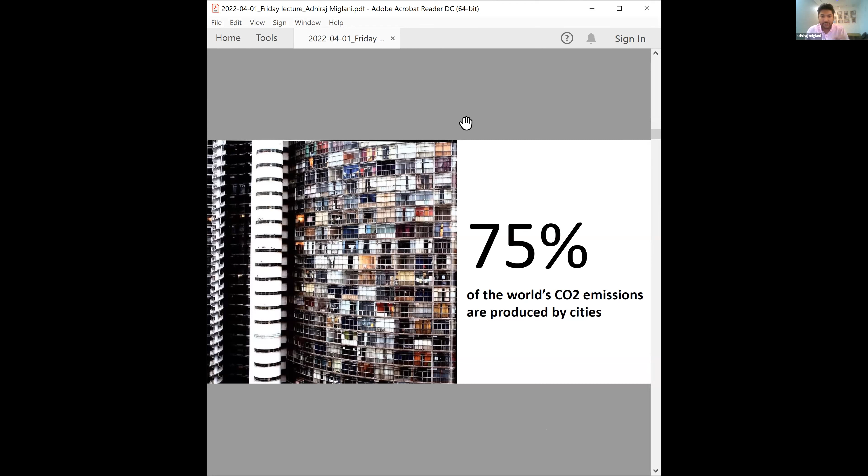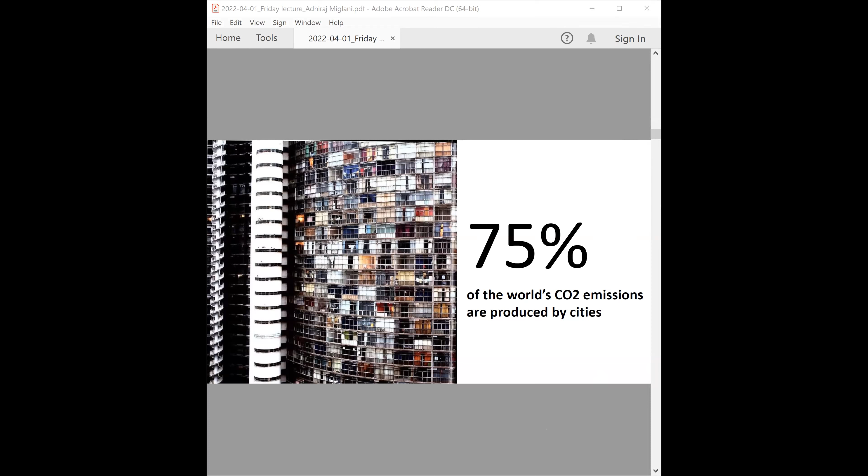Adhiraj, I'm sorry to interrupt, but could you just put the presentation in full screen mode? Oh, okay. Yeah, thank you. Sorry, Tushar, there's something happening. I'm not able to see that. It's still visible in the window. Because what happens is my screen goes black when you put it on full screen. Could you just reshare your screen and then try that? Yeah, that will solve the problem. Just a second. Sorry for this. Is it fine now? Yes. Okay. So as you can see, sorry.

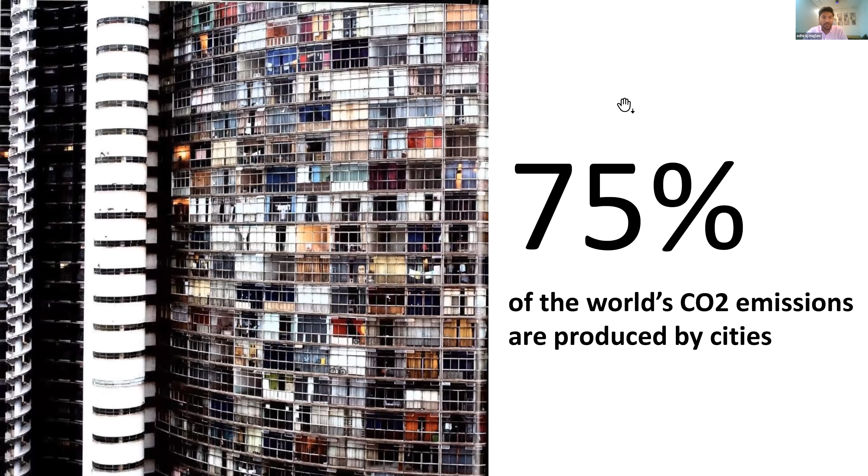There's a growth in urban poor in the cities. Maybe it's time to craft sustainable housing solutions for them. Then, as we can see, in some of the cities there are 40 people per minute being added. So it's a huge, huge number, I would say. And in India especially, 70% of the cities still need to be developed. So we really need investments to focus on this opportunity so that we can realize it to the fullest.

Then I pose this question to everyone: is the city a ticking time bomb, or is the city an opportunity? Can we sustain the city as a great environment to live, work, and play, and yet it can be an economic engine? How do we ensure that our cities grow sustainably and our buildings reduce their carbon footprint incrementally? Is building green the solution, or are there credible alternatives?

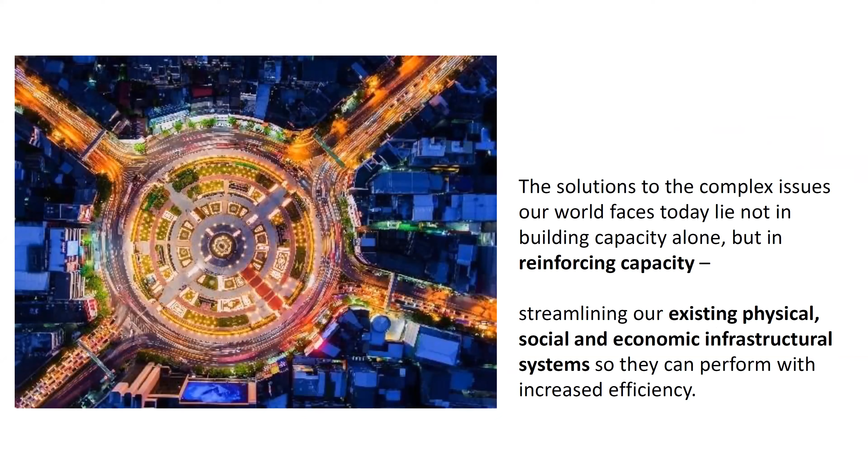There's a growing understanding amongst architects and urban planners of the latent potential of disused and underutilized buildings and urban spaces in our cities. It points to the general progression of the ideas from the circular economy. The circular economy is based on three principles: eliminate waste and pollution, circulate products and materials, and regenerate nature.

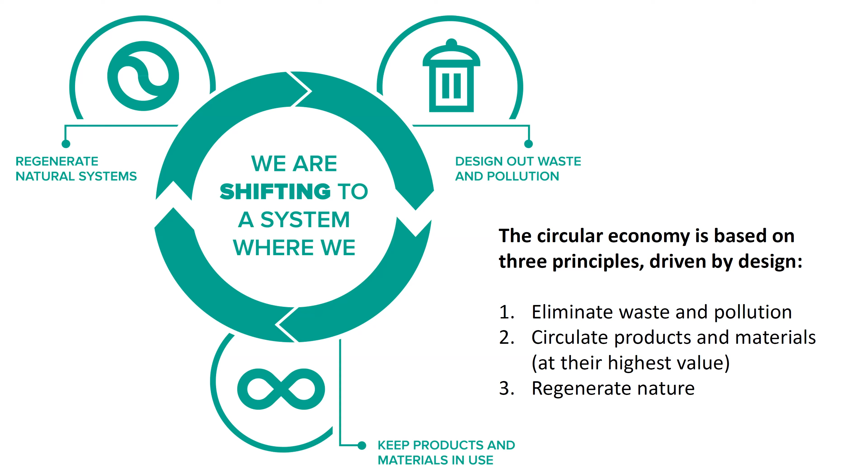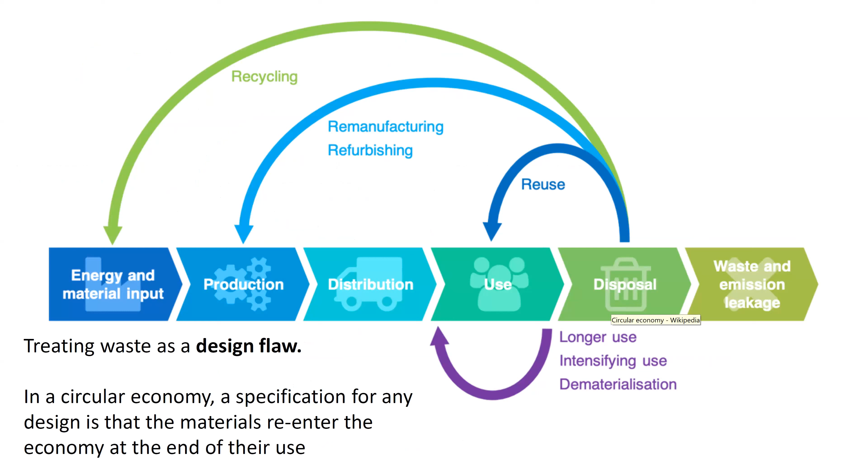In our current economy, we take materials from the earth, make products from them, and eventually throw them away as waste. The process is linear. In a circular economy, by contrast, we stop waste being produced in the first place. The first principle of the circular economy is to eliminate waste and pollution. Currently, our economy works in a take-make-waste system. We take raw materials from earth, we make products from them, and eventually throw them away as waste. Much of the waste ends up in landfills or incinerators and is lost. We take this linear take-make-waste system and make it circular.

The second principle of the circular economy is to circulate products and materials at their highest value. This means keeping the materials in use, either as products or, when those can no longer be used, as components or raw materials. This way, nothing becomes waste and the intrinsic value of the products and materials is retained. There are a number of ways the products and materials can be circulated. There are two fundamental cycles, the technical cycle and the biological cycle.

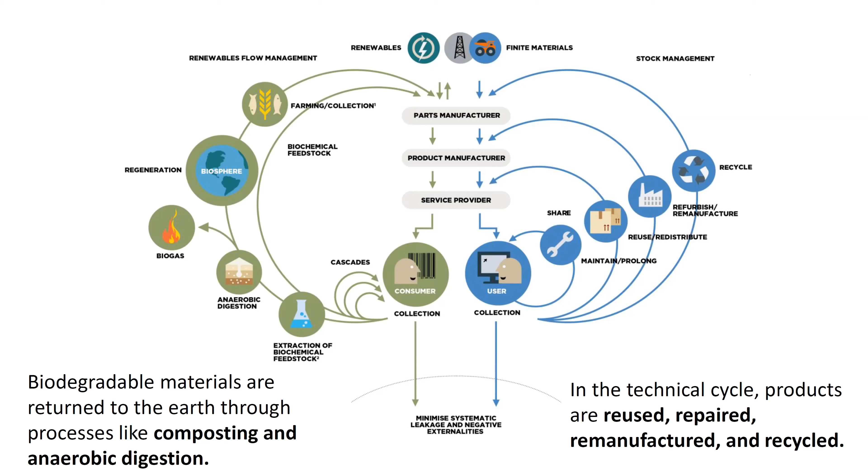And lastly, the third principle of the circular economy is to regenerate nature. By moving from a take-make-waste linear economy to a circular economy, we support natural processes and leave more room for nature to thrive. Instead of continuously degrading nature, we build natural capital. We employ farming practices that allow nature to rebuild soil, increase biodiversity, and return biological materials to the earth. Waste is a concept and a human invention. It was not there before.

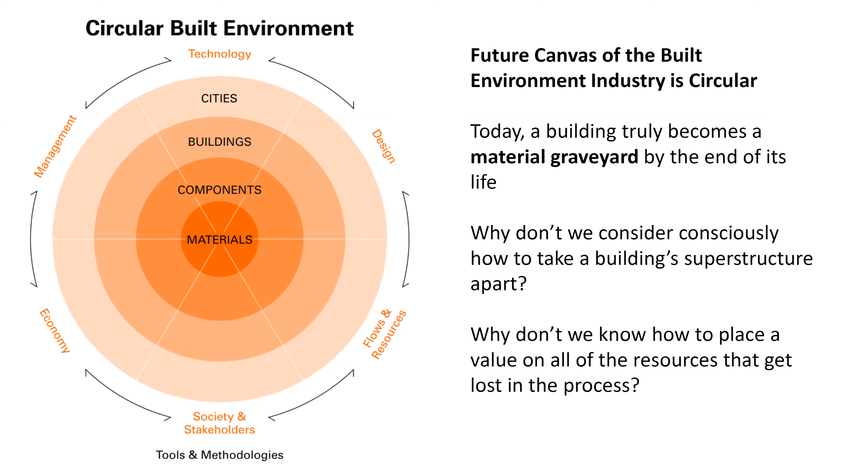Taking the values from the circular economy, how can we put them to use towards building a circular future? The aim is to challenge and rethink the way we use and reuse resources in the building industry. I would say the future canvas of the built environment industry is circular. Today, a building truly becomes a material graveyard by the end of its life. So the question is, why don't we consider consciously how to take building superstructures apart? Why don't we know how to place a value on all the resources that get lost in the process?

With building a circular future, we want to challenge and rethink the way we use and reuse resources in the building industry, ultimately eliminating the concept of waste. The goal is to inspire future buildings that are designed and constructed so that they can be dismantled without significant impairment and loss of resources. It is brought together through the principles of design for disassembly, material passports, and the circular economy.

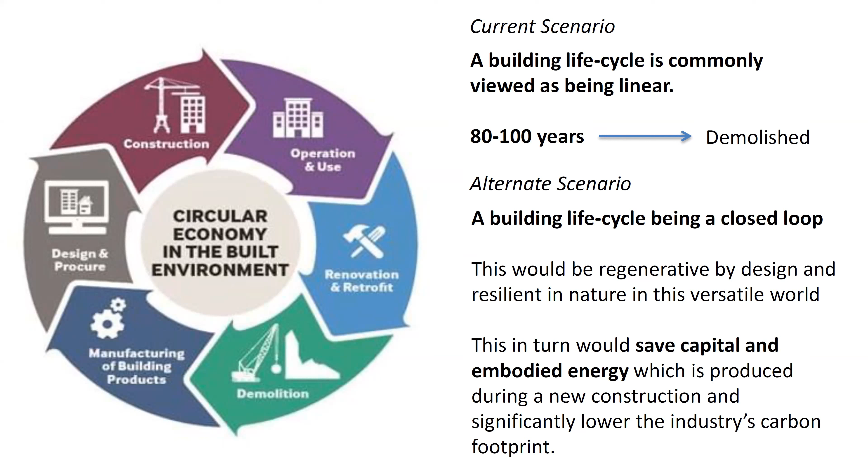Nowadays, we see most buildings are demolished after 80 to 100 years of use, in some cases even sooner. This is done to pave the way for newer developments, with construction materials and components hardly ever being recycled. If we try and understand the building life cycle as a closed loop, where the building itself and all its parts offer themselves to being traded in cycles, being recycled, refurbished, or reused, then there is a potential for a new urban framework to emerge.

So design for disassembly is a holistic design approach where the intention is to make any given product easy to disassemble into all its individual components. This allows the different components to fit into a closed material cycle where they can be reused, reassembled, and recycled into new products of similar or higher quality. Because of the holistic nature of the philosophy, it can be applied to any type of product on any scale with any level of complexity.

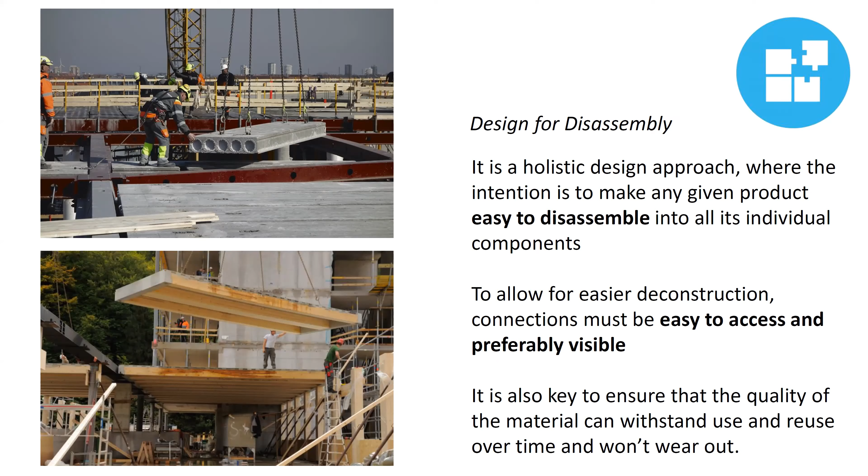But how can we put all of these notions into our Indian context? India has been encouraging the basic principles of reduced consumption, recycling, and reuse of material. Our ancestors understood the environment very well and adopted the same in their lifestyle. The key to architectural sustainability is to work with rather than against nature, to be sensitive so that we don't damage the natural systems, as they believed that nature knows best.

Utilizing India's engineering and craft systems by conceptualizing designs which correspond to sustainability through the multiple lenses of cultural, social, and environmental impact is very important in India. Capitalizing on designs that accept and celebrate context, making locally relevant choices that help sustain our local economy and environment.

As making goes mainstream, the search for authenticity accelerates and can weave through crafts that contribute in many ways and provide major employment in our country. Known for its rich heritage and history of craft, it also helps in empowering the local communities and strengthening the local economy. Craft is just a manifestation of the physical realm of design using both theory and skills. And we have an abundance of this skill in India.

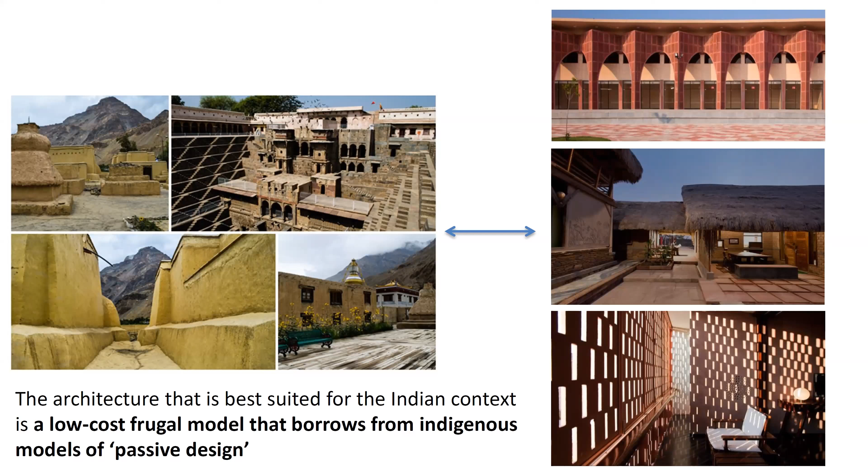Today, architecture should be grounded on the principles of conscious design, an approach that celebrates local resources, cultural influences, a keen attention to detail, and an inclusive process. This should follow an iterative and incremental methodology of innovation rooted in the learning of history and local context.

I would like to culminate all of the notions which I have talked about before into this example. So this is done by Studio Lotus. At that point of time, I was the project lead among others in this project. And this was a competition on the national scale, which was to design a visitor as well as a knowledge center in the Mehrangarh Fort. So it's rethinking the Mehrangarh Fort and museum precinct.

The basic parameters that we had used before starting off this project were, firstly, it should be non-intrusive, meaning to be sensitive to the historical context and not suggest interventions that are imposing. The fort shall always remain in the foreground, and the new inserts shall blend effortlessly into the immediate context. Second, it is to be sustainable, to adopt strategies that encourage social, economic, and environmental sustainability.

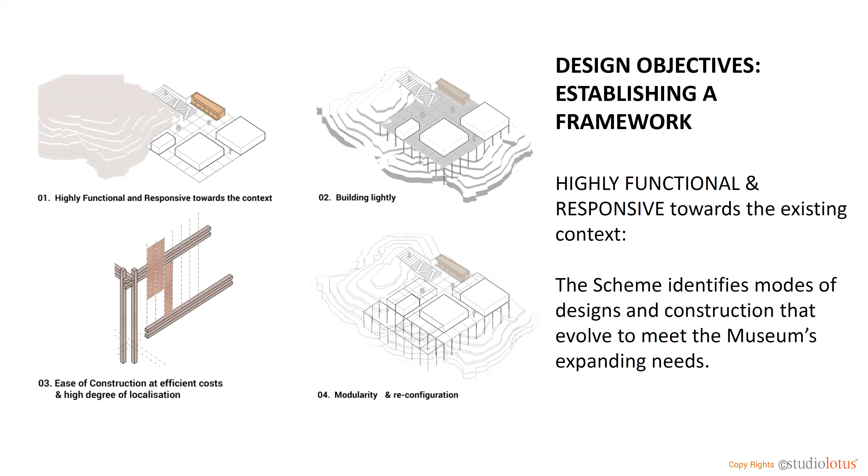The proposal that we suggested was not a building, it was a kit of parts. It wasn't a building which we were designing, but a system. Designing a building as a kit of parts allowed us to create a built structure that, if required in the future, can be dismantled, reshaped and put together again as per different programmatic needs. This allowed minimized work on site, which means maximum production off site. There was hardly any cement concrete, and it was a dry construction with almost no water required, but very selective lime mortar for screeding.

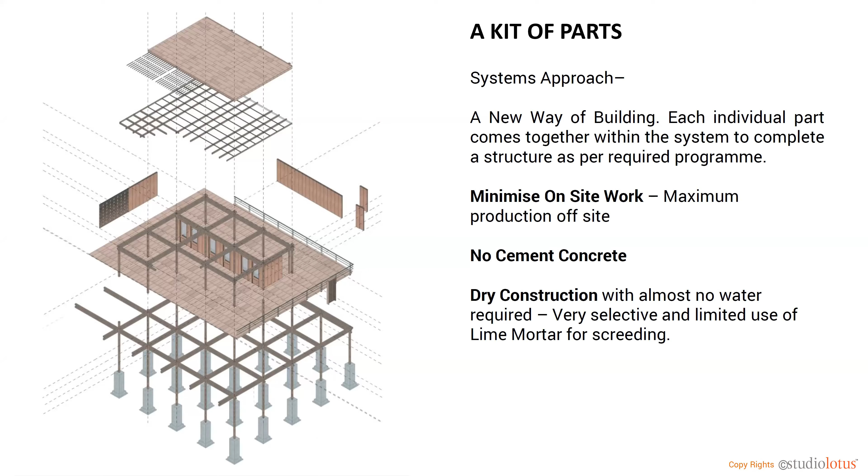This engineering and craft system has been conceptualized to correspond to sustainability through the multiple lenses of cultural, social, and environmental impact. The design accepts and celebrates context, making locally relevant choices, which helps sustain the local economy. The lattice screen and the jali that you are seeing is a prototype at the moment. We conceptualized this contemporary pattern by looking at the jharokas and the screens of the traditional Rajasthani haveli. It filters the light from the harsh sun and allows the air to pass and cool the spaces within. Local stone is being used as the main building material, as you can see.

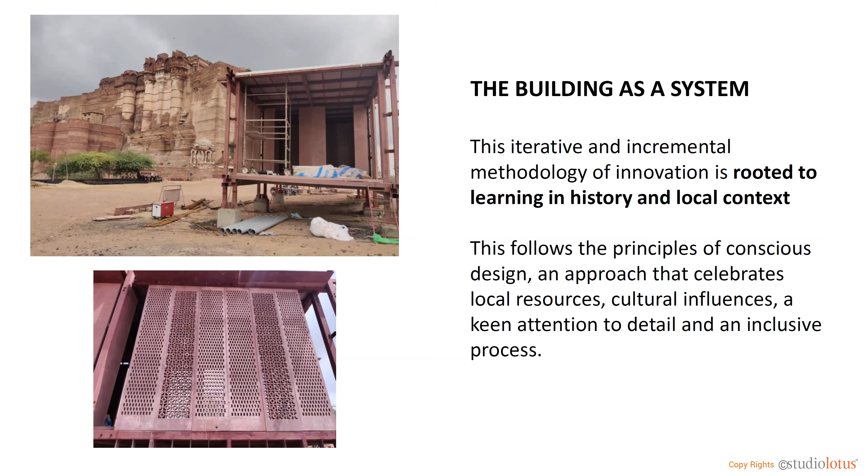So the expression that we were aiming for in this project comes down to the principles of regional, contemporary, and frugal. Regional meaning we use the local materials and skills. It adds value to regional building knowledge and skills and responds to key elements from the fort. It is a patron of local crafts and new art forms.

It is contemporary, allowing for emerging programs to shape the building. It uses the current best practices for structure, engineering, and sustainability. It is a versatile building technology that allows for highly flexible routing of services through the building. And lastly, it is frugal, meaning minimal consumption of non-recyclable materials, an almost entirely locally resourced and reconfigurable steel structural system.

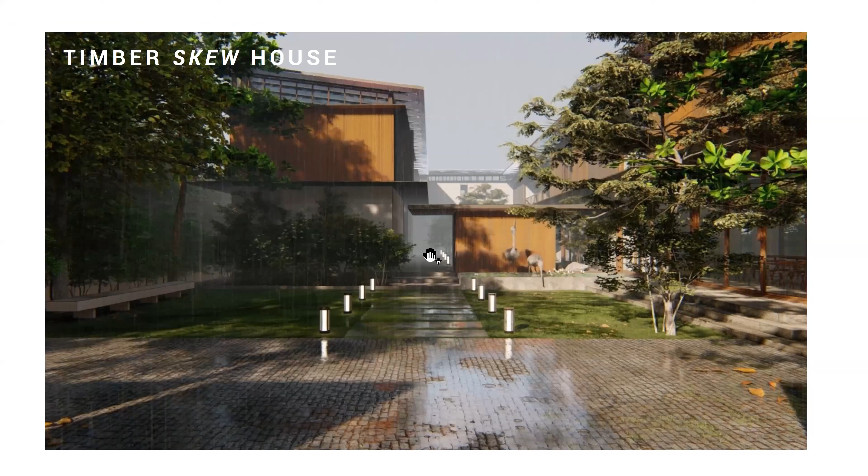The next one I would like to talk about is a project that I am currently doing in Raipur. It is a modern take on the courtyard notion for a family residence. It is a 9,000 square feet house consisting of two timbered louvered linear blocks set inside a plotted development. It's a modern take on a residence, turning the notion of a closed-up entity into an indoor-outdoor experience of the residence for its people.

This is repeated across all areas of this integrated, not so integrated house. It gets magnified even more with the separation of the two blocks overlooking a network of green courts and reflective pools that weave the site into an inhabitable whole. The internal courtyard with building mass all around it and the pool create a microclimate within the residence.

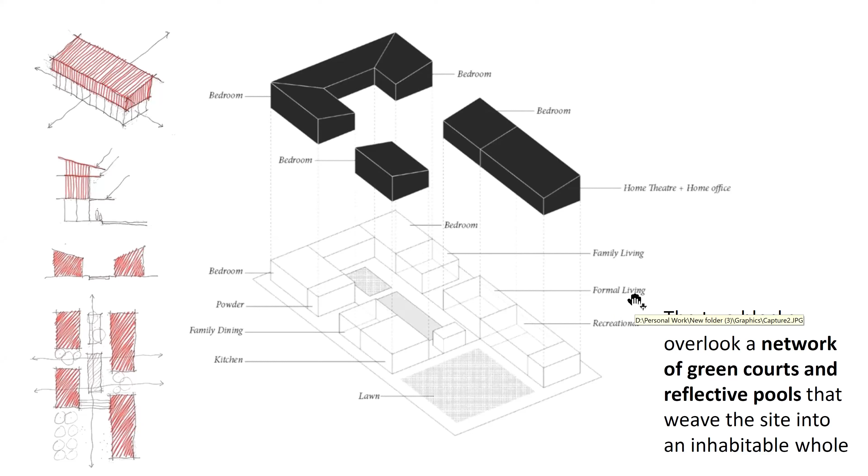As you can see in this image, we can see the courtyard in the center and these two different blocks on either side. This reflective pool in the middle and the greenery create a microclimate for the whole residence. And it is not a closed residence at all, as you can see. It's an indoor-outdoor experience that we are giving to the users.

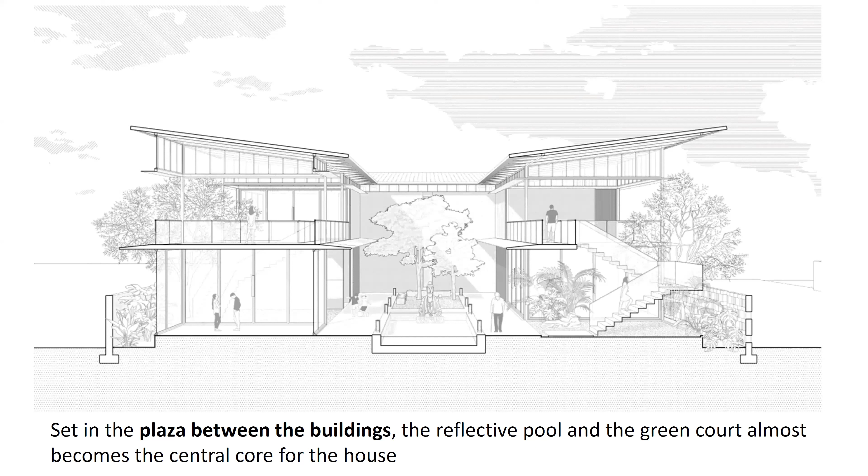The family, dining, kitchen, and master bedroom are contained in the south block, while the north block contains the formal living, family and the guest room. All bedrooms and interstitial terraces are contained in the upper level timbered louvered blocks. The reflective pool covered with floating lilies and a submerged Buddha statue almost feels like a meditative space. These are some of the renders of the house, as you can see.

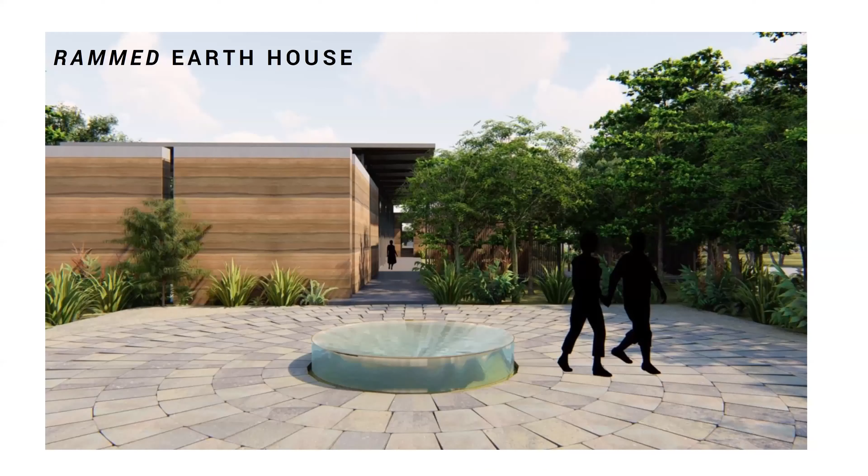It is clearly visible how open this house is and how the notion of the traditional heritage courtyard has been contemporized into a residence which gives an indoor-outdoor experience at every step of the way. The third example I would like to take is inspired by the indigenous methods of creating houses using mud. This is a contemporary take on that.

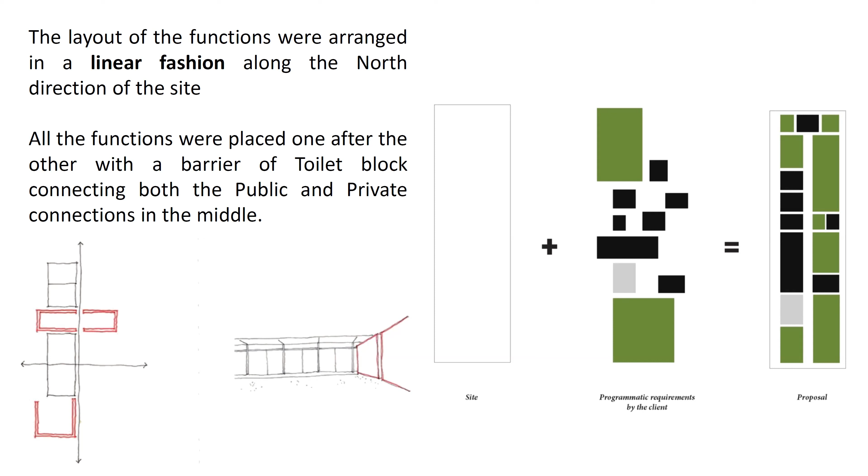So the layout of the functions, as you can see, has been arranged in a linear fashion along the north-south direction of the site. All the functions were placed one after the other with a barrier of toilet block connecting both the public and private zones in the middle. This formed two courtyards on either side, with one acting as a garden for outdoor parties and the other being a garden to grow fruit trees.

So as you can see in this plan, the dark, thick black lines represent the rammed earth walls. This is a farmhouse in which the clients wanted an inside-outside relationship with the external environment. The site encounters extreme heat because it's in Raipur. To counteract that, the rammed earth walls are used as external barriers, in turn cooling the inside with their thermal mass.

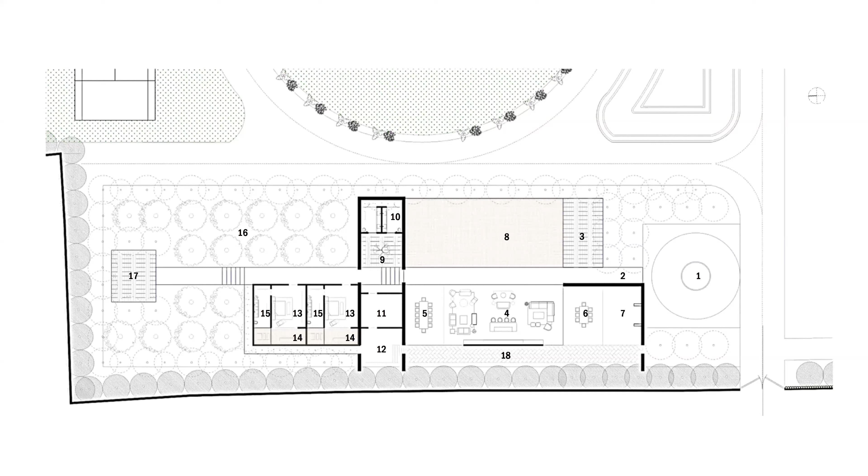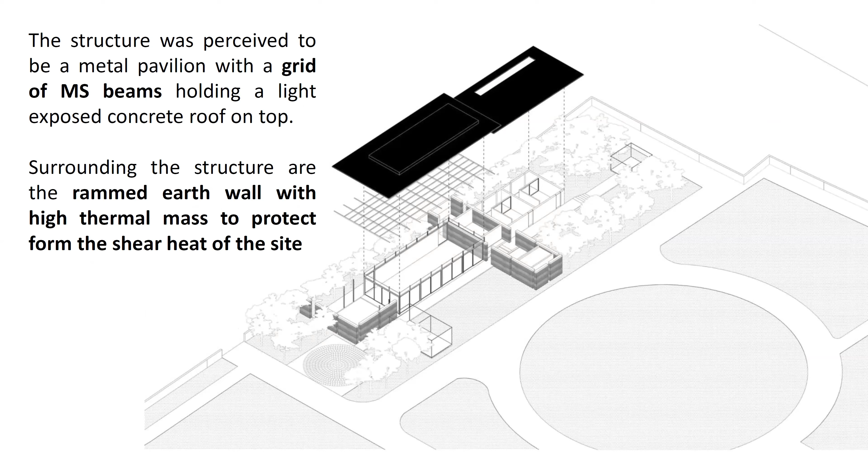The inside-outside relationship is maintained by providing long double-glazed sliding window panels of 4 meters height, which can be moved to one side to have a seamless dichotomy of inside and outside. So the structure was perceived to be a metal pavilion with a grid of MS beams holding a light exposed concrete roof on top. Surrounding the structure are the rammed earth walls with high thermal mass to protect from the sheer heat of the site. So some of the renders, as you can see.

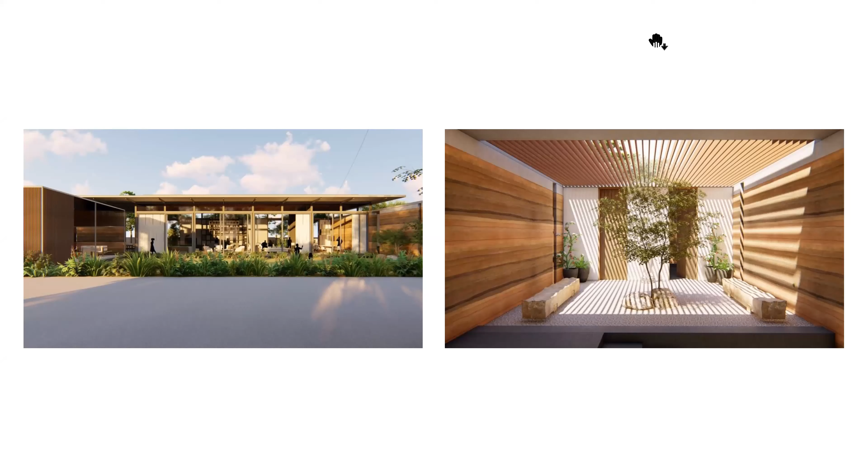On the end note, I would like to say, we need more blue people to change our vision for the community, city, and world at large. Coming back from where we started, our discussion of the village, the blue and the orange people. A fundamental shift should be thought in the manner with which we look at development and redevelopment. A more sustainable and sensitive alternative approach should be imagined for our built future, which could potentially be a low-hanging fruit to the inflexibility of the conventional construction of the 21st century.

We will continue to need more of these blue people to change our vision for the community, city, and the world at large. Hence, I would say the canvas of the built environment industry is circular, by designing buildings and spaces that are relevant, responsive, and add meaning in the larger fabric through the smallest detail. Thank you.